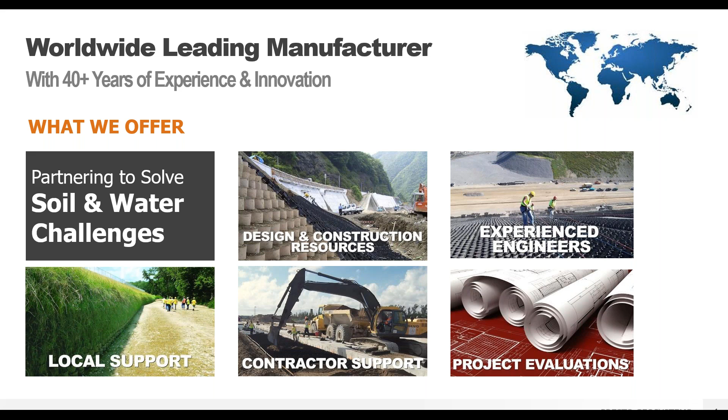We operate in 4 product areas using our GEOWEB geocells, which can be used for load support, slope and channel protection, and constructing green retaining walls. We have porous pavements, both vegetated and aggregate solutions, and lightweight reusable construction mats. Like I said, today is going to focus on the load support application, hopefully with a little discussion on the concrete channels.

So let's begin with discussing how GEOWEB 3D confinement can provide benefits for unpaved and paved surfaces. The GEOWEB system consists of 2 main attributes. The first is the cell size. The cells come in 3 diameters: 8.5, 10.5, and 18 inches. The cell wall heights include 3, 4, 6, 8, and 12 inches. The actual cell size and height depend on site-specific project details and site conditions.

We will provide a free evaluation, typically including a written summary, cross-sections, calculations, and specifications, for free. No matter what size of project, we provide the same amount of service.

The ultrasonically welded seam, where all the connecting points are located, is very important to the function of a geocell. The stronger the seam, the better performance of a geocell, period. A strong seam allows for better lifetime performance. GEOWEB is produced using high quality, 100% virgin, high density polyethylene for consistent and strong welds at the seam.

GEOWEB geocells do not use fillers or exotic polymer alloy blends, which can ultimately reduce weld strength and are offered in some competing products in the name of increasing cell stiffness and reducing cost. To avoid weld failures and the damaging effects of differential settlement, uniformity and performance across all elements of the geocell is much more important than stiffness alone.

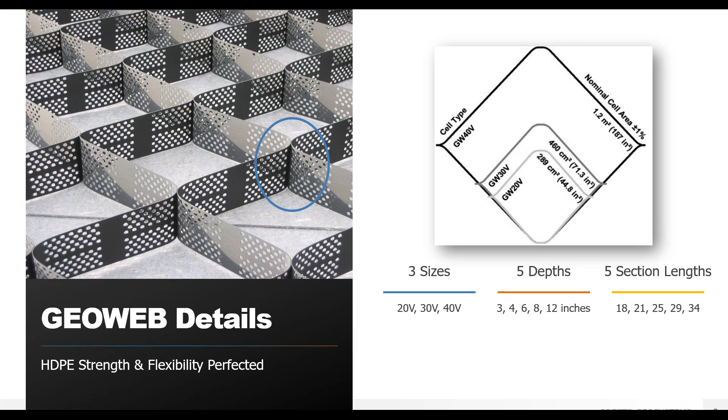Here you can see a typical GEOWEB panel. It comes tri-folded on a pallet. Each section has a nominal width of 8.5 feet, with lengths up to 34 feet, depending on which size you go with. The panels are very flexible.

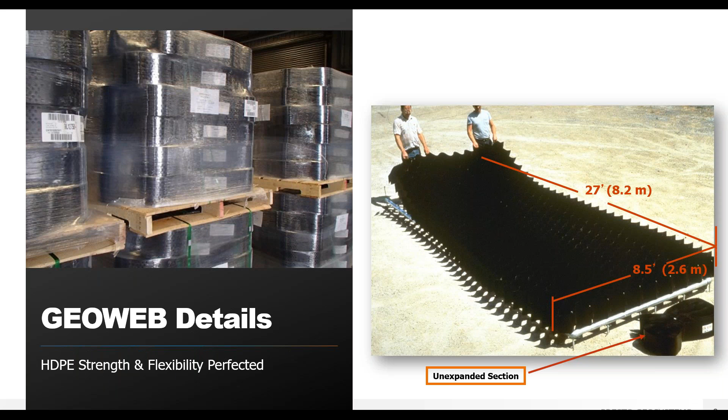They open like an accordion, so they're very flexible and can accommodate a site that is not completely level. For a geocell system to perform, it's critical that both the factory welded junctions and the field junctions that connect individual panels perform at a level commensurate with the cell walls. Therefore, incremental improvement in one characteristic is only valuable if improvement has also been made in the other components of the system.

As I said, GEOWEB is made from 100% virgin HDPE. It's a proprietary formula that has stood the test of time for more than 40 years, containing no filler or exotic polymer alloys. For most typical sites, GEOWEB retains its durability for greater than 50 years based on lab testing, indicating no degradation even at full 100% UV exposure from the sun.

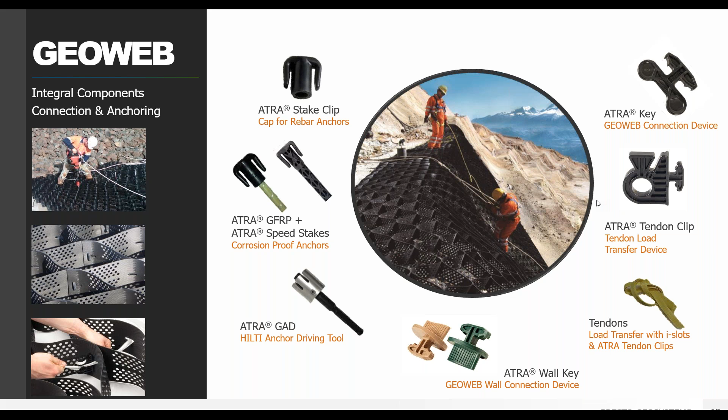You can see a picture here of a very steep slope. We're using polyester tendons, almost like a set of drapes, hanging off the slope. We use ATRA tendon clips, which tie around the tendons and bring the load up to the top of the crest. We have all kinds of different accessories, no matter if you're doing a load support application, a slope, channel, or a wall.

For load support applications, the ATRA key is a major component for a completely integrated system. ATRA keys connect GeoWeb panels into a single system. The keys' speed installation are made out of plastic and will last the lifetime of the project. ATRA keys ensure that the panels will not separate and that the GeoWeb system will not fail under anticipated cyclical loads. The specific engineering values of the ATRA key will ensure the system holds up to loading over time without the corrosion seen in staples or the failure of underperforming zip ties.

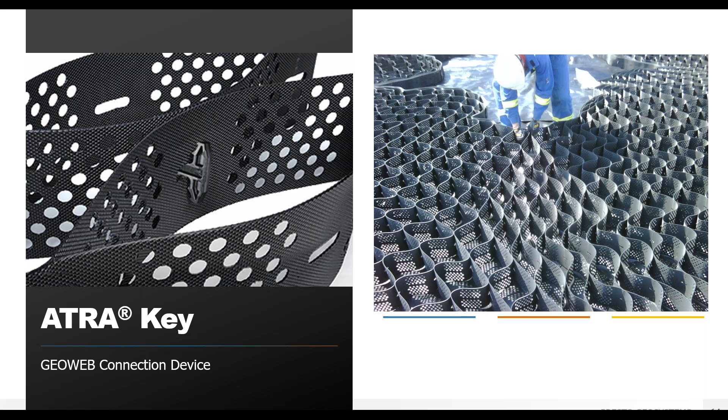The purpose of the cellular confinement is pretty simple. It's basically just to stabilize the movement of unstable soils, whether that's horizontally or vertically. It is an engineered system integrating multiple geosynthetics with the best method of confinement and subgrade stress reduction.

Here's a typical cross section for a load support application. We start with a subgrade, a bearing strength, typically expressed as a CBR, California bearing ratio, or an LBR.

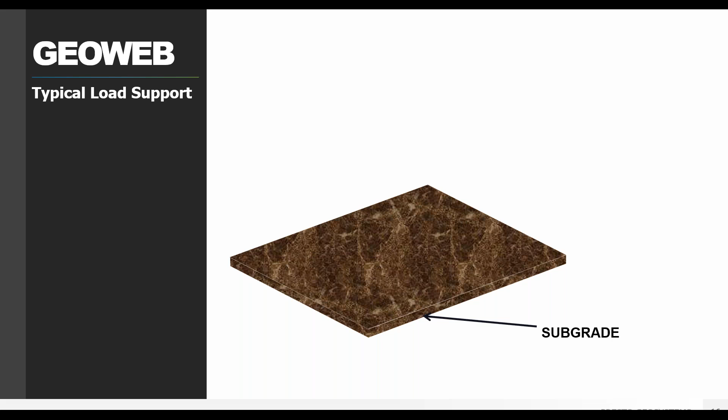Then we decide if we need a non-woven or a woven geotextile based on the system application and subgrade type. 95% of the time we are going to have some type of geotextile underneath it, unless the subgrade is the same material which goes into the geo.

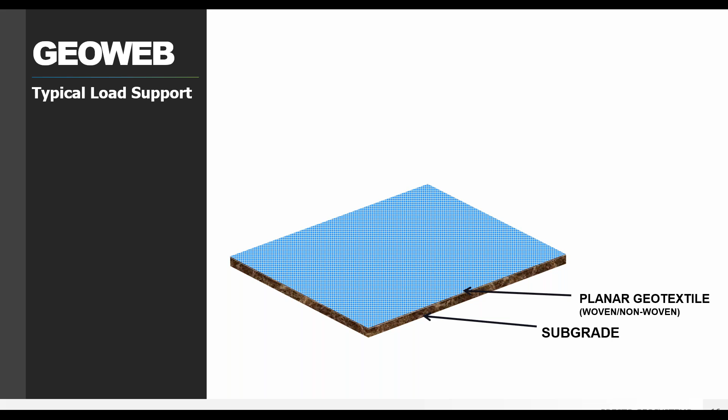When we are talking about woven geotextiles, I'm referring to enhanced woven geotextiles, not slit tape wovens, which have very limited flow capabilities. They're almost like a pool liner, so you get water pore pressure buildup underneath that geotextile. If you have a slit tape, it doesn't allow water flow, and it can actually build up pore pressure and lead to global failure. So we never recommend using slit tapes under geo for any type of application.

A subbase may be required, and we'll determine that during our evaluation. We do our calculations, then the geo is put down. Like I said, we can fill it with sand, recycled materials, on-site materials with less than about 10% fines, or crushed aggregate.

Going to have a surface course. If it's an unpaved road, we like to see a minimum 2 inches over the top, whatever the material is, supporting the given load.

Geoweb 3D confinement works this way: when a vertical load is applied, the active earth pressure in the loaded cell pushes back against the passive earth pressure in the adjacent cell to form a stable system. So each cell helps support the ones around it. The Geoweb cell walls transfer hoop stress, which is important to keeping the system intact. It creates what is known as the mattress effect.

So the strength of the seams around each cell, the material stiffness of individual strips, and the connection method between panels are all important factors in determining how the geosystem can improve site conditions. Strong seams, semi-ductile resin properties, and integrated connections are critical to uniform performance.

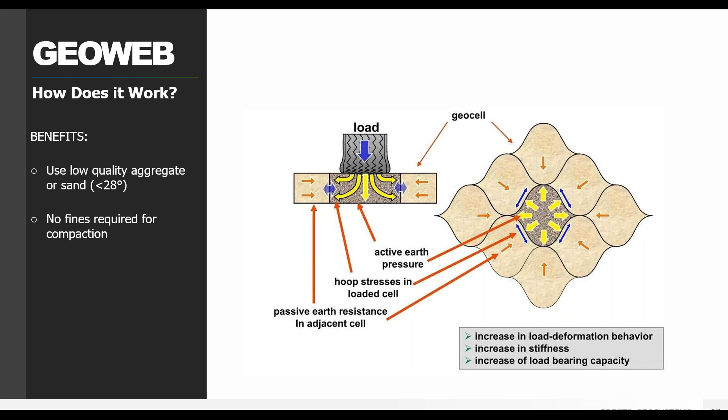Here you can see the stresses on a typical subgrade: unsupported on the left and geo reinforcement on the right. You can notice how there's a complete elimination of high stresses at the surface with geo. Stresses are reduced and distributed over a wider area. Once again, we call that the mattress effect. It reduces the stress reaching the subgrade and leads to a significant decrease in deflection and rutting.

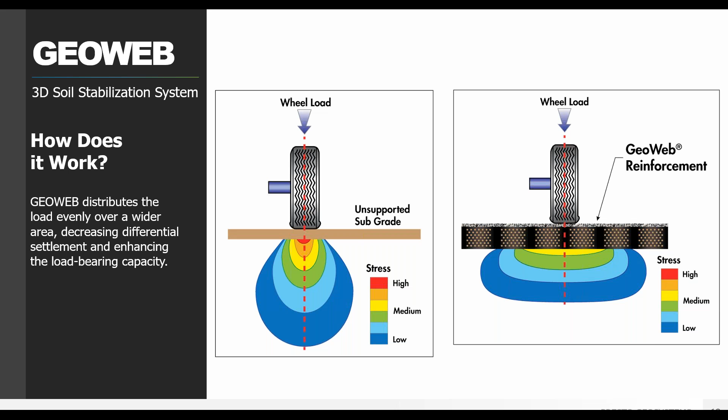The second main attribute of the geo system is the infill. One of the important benefits is we can actually use, as mentioned, low quality aggregate, recycled materials such as recycled or crushed concrete, and even coarse sand. When we invented the geo back in the late 70s with the Army Corps of Engineers, the main use was for sand roads and beaches, getting heavy vehicles around beach sand. It was actually called sand grid back when we first invented it with the Army Corps of Engineers.

We can also eliminate fines when desired, since the cells provide confinement, aiding compaction and cohesion of the soils. Without the fines, you can significantly improve drainage and let the water flow freely through the system, preventing pore pressure buildup and global failure. Also, you can use that open area, that void space, about 35% for 3/4 inch crushed aggregate.

You can imagine the amount of storage that you can store inside the geocell.

The ability to use sands and low quality aggregates really sets us apart from other geosynthetics. Those products require high quality crushed aggregates, high friction angles to achieve optimal performance. With our system, low friction angle materials in the 20s are just fine. The geo panels achieve their full potential even with these poor materials, which can be a significant cost savings if you can use on-site or recycled materials.

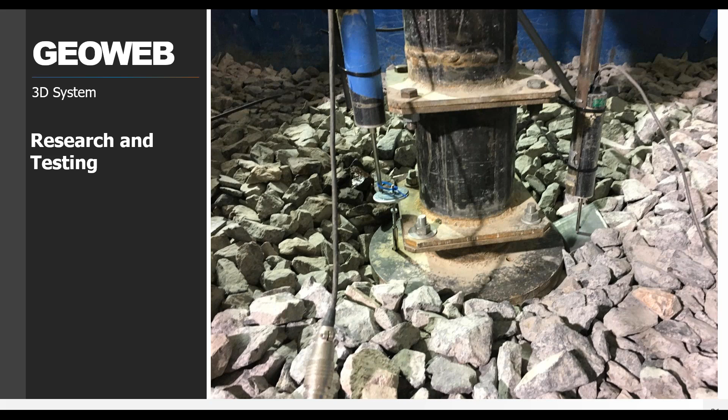I'd like to speak a little bit about some recent research we've done on cyclical loadings. The research was conducted at University of Kansas under the direction of Professor Han, who has been conducting research on geocells for almost 20 years. Ben Leshchinsky, professor at Oregon State, did his PhD thesis on geocells and conducted the finite element analysis. And Hai Huang from Penn State provided smart rock technology.

We wanted to use the recent technology to confirm the stabilization benefits of the geocells. That program was conducted over weak subgrades at University of Kansas. We put it under a 37.5 kip wheel, and varied the subgrade CBRs from 0.5 to 5%. We did a bunch of different control sections and geocell supported sections.

Smart rock included a motion vibration sensor that could record rotation, translation, and orientation. The earth pressure cells were used to measure the vertical stresses and displacements at the interface between the surface and the subgrade.

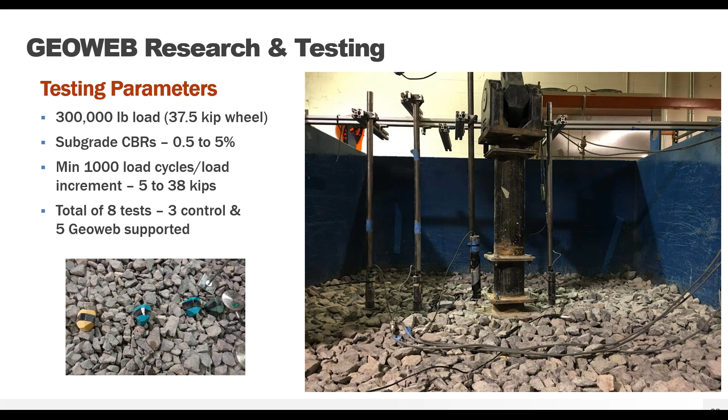The cross section consisted of an enhanced woven geotextile, a 6-inch geocell filled with crushed aggregate, and an 8-inch surface layer. To evaluate movement under cyclical loads, we put smart rocks inside the geocell panels, and also located one 4 inches above, in the middle of that 8-inch cross section, with earth pressure cells another 4 inches above that.

So the goal is to confirm the stabilization controls movement not only in the cells, but also above the panels.

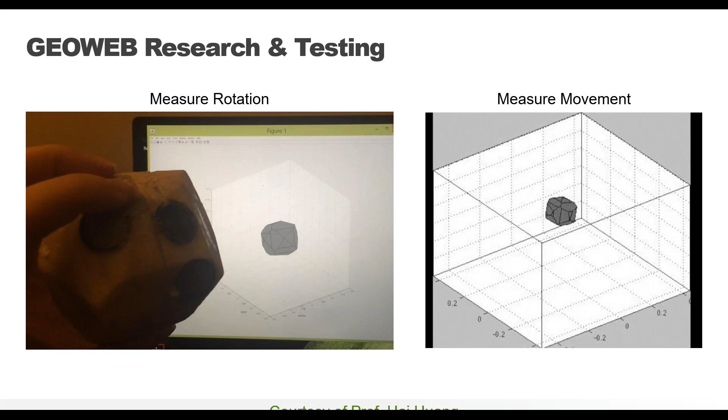Here you can see the smart rocks, how they actually measure rotation. Under a cyclical load, when you're getting rotation, you're breaking down that material, which leads to loss of aggregate over time for an unpaved road, basically attrition. You get a lot more rutting and material breaks into smaller particles.

We also looked at movement, basically side to side, and how that cyclical loading would move that material not only in the geocell but also above it.

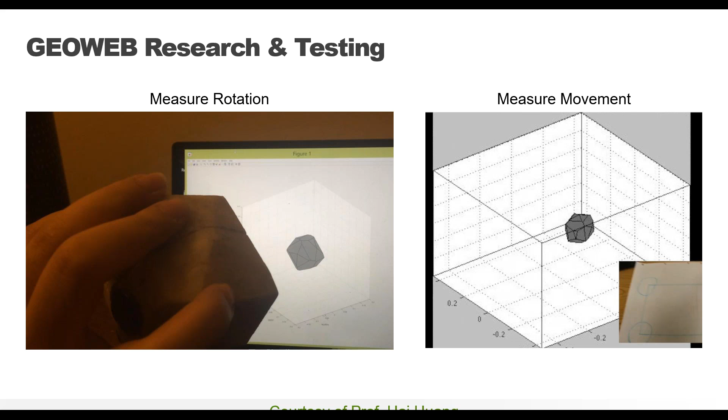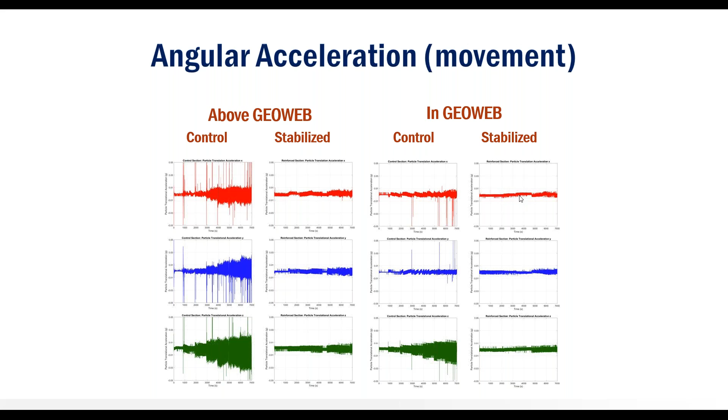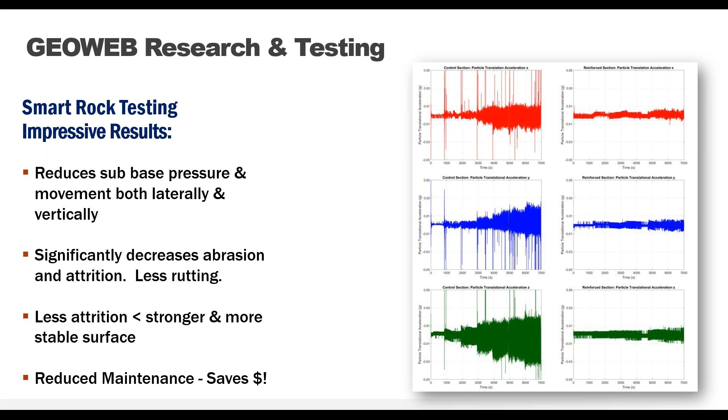The results clearly show that Geoweb stabilization significantly reduces particle acceleration and velocity, not only in the cells, but below the surface and between the top of the geo panels. This will effectively minimize movement of your infill by providing lateral confinement, so breakage, vertical compression, attrition, and spreading are minimized, and performance can be significantly improved. By controlling particle movement and rotation, this leads to decreased maintenance and rutting for unpaved surfaces and a more stable base for paved surfaces, directly leading to cost savings.

Here you can see the finite element analysis, which is what Dr. Leshchinsky did. The confinement was effective in redistributing vertical stresses on the subgrade, resulting in large areas of subgrade mobilization, shear strength, and reduction of plastic deformations.

Geoweb reinforcement decreased the pressure at the subgrade interface by over 50% for weak subgrades. It also increases the load-bearing areas of subgrade and results in decreased interface pressures, which leads to lower subgrade settlements and rutting.

I want to go through some typical projects we've done for unpaved and paved surfaces. Here's a typical problem—one of the first ones we did way back in the day. I'd like to show this one because it's a significant amount of rutting. This project was a real rush, an intermodal facility by our office in Wisconsin.

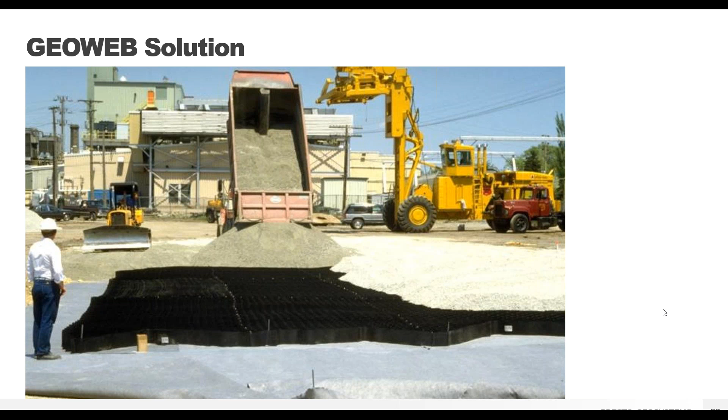After a couple passes of the reach stacker, you'd get significant ruts on the surface. We worked with the rail company and came up with a solution. This was before we put perforations and texture into our geo panels. You just dump crushed aggregate on it, spread it out, and there's no rutting. This was a heavyweight non-woven geotextile, 8-inch geo, and a 3-inch wear surface. So we went from rutting to a stable surface.

This is an intermodal project we did for CSX down in South Carolina. As you can see in the picture, the 60-ton reach stackers were severely rutting on the existing aggregate yard. The rutting led to slowing down not only the unloading but the loading of the containers, along with routine maintenance to keep the yard in operation.

The subgrade here wasn't too bad, like 1.5 to 2%, but there were a lot of fines, which led to rutting. They had graders on this site almost continuously, because after a couple passes of the reach stacker, you can see ruts almost halfway up the tire.

We worked closely with CSX's engineering to come up with the Geoweb system to support the load and eliminate the rutting. Based on the available geotechnical data and working with the geotech for the project, it was determined that the existing infill material on the site could be reused to fill the geo panels.

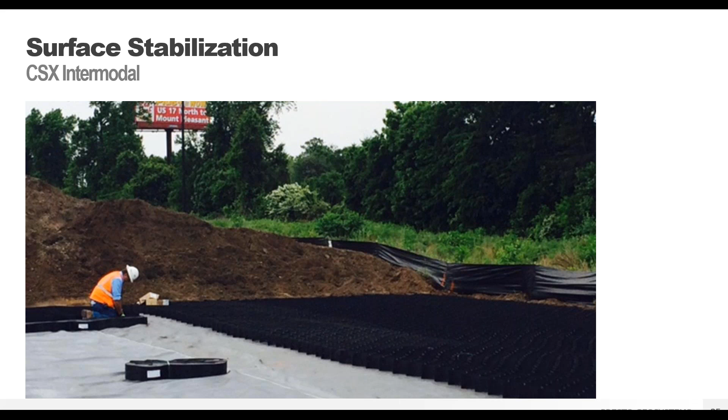This led to a significant reduction in cost by avoiding the need to import outside aggregate fill for the geo. The solution consisted of an enhanced woven geotextile, 6-inch geo, and a 4-inch wear surface. You can see the enhanced woven geotextile and the geo going down, and the geo panels being filled with on-site soils. The contractor stripped off the existing surface material down to the desired elevation and stockpiled it to use for filling the geo panels, eliminating the need to import costly fill.

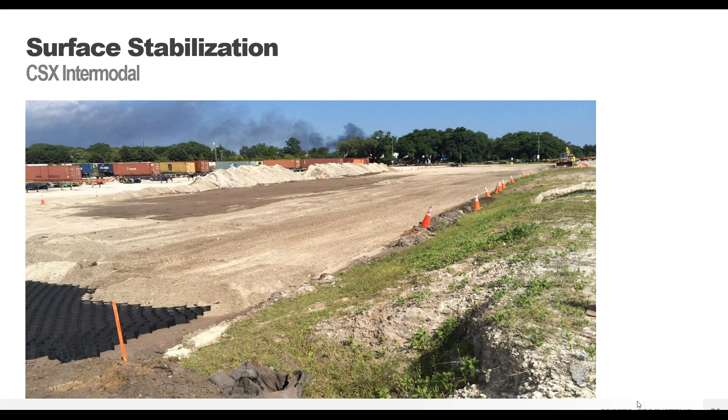The big thing with this application is they completely eliminated the daily maintenance. They got the yard back into service a lot quicker because they didn't have to import all that fill. You can see the final solution: the Geoweb system supporting the load. The Geoweb confines that fill, even on-site fill with high fines, essentially eliminating the potential for rutting.

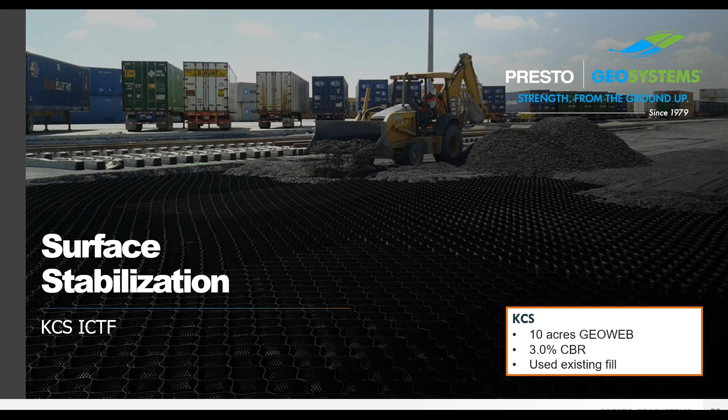Here's a project we did down in Mexico for Kansas City Southern Railroad. The original design called for reinforced concrete, but the bids came in well over budget. The subgrade wasn't that bad, but the railroad came to us for a value engineering solution. We worked closely with the engineer, who came up with the solution to support 80-ton reach stackers.

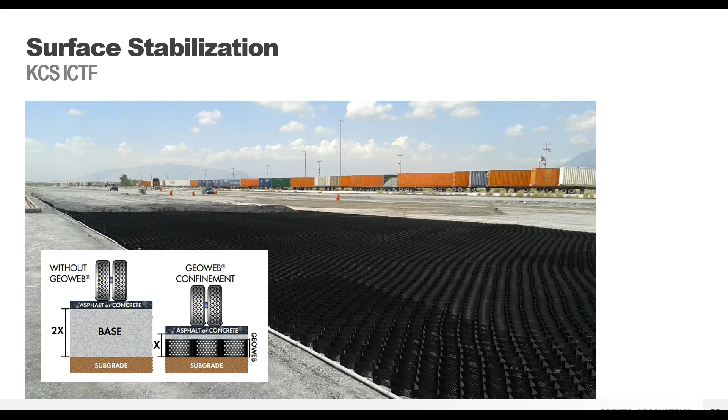The design here is the same as the last one: an enhanced woven geotextile, 6 inches of Geoweb filled with low quality fill, and a 4-inch wear surface. You see it being infilled with low quality crushed aggregate. Here we limited the fines to about 15% to allow for some storage of stormwater infiltration into the site. In this photo, the truck dumps the aggregate into large piles onto the panels, either with a front-end loader or a bulldozer.

The aggregate can just be pushed into the empty cells. It's a pretty fast and efficient process. It doesn't take any additional training or expertise on behalf of the contractors.

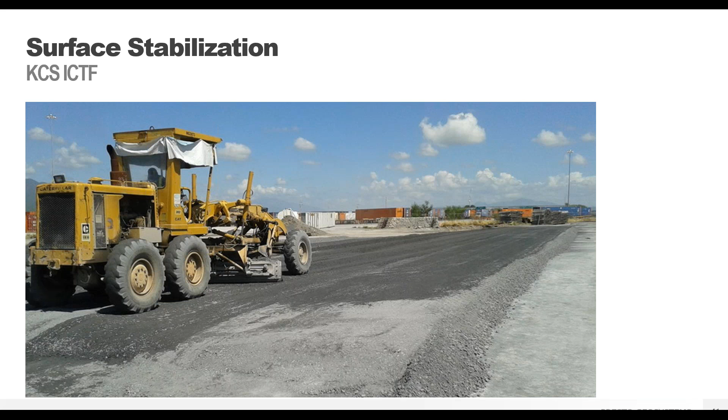Now here you can see the final wear surface. After placement, they wanted to keep the dust down a little bit, so they provided an asphalt tack coat, sort of as a surface stabilizer to control the dust.

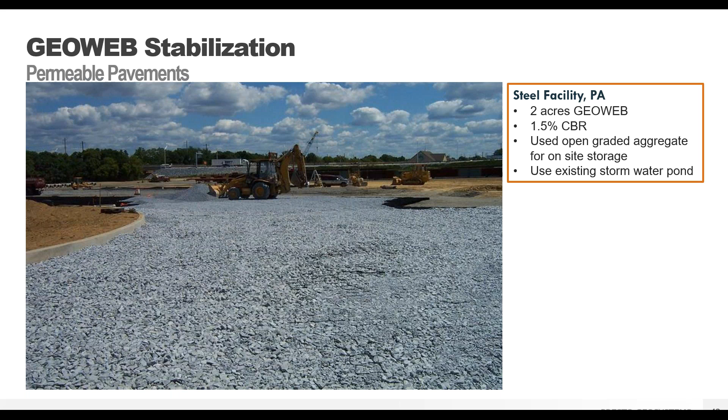This was an interesting project we did. We solved two issues. This was a 2-acre site in Pennsylvania where the owner wanted to increase the size of his manufacturing facility. The first issue was to provide a durable surface, something that these big gantry cranes can operate over.

The existing subgrade is about 1.5% CBR. So through the design process, we came up with, once again, a heavyweight non-woven geotextile, 6 inches of GEOWEB, and a 3-inch wear surface.

The second issue was to provide on-site water storage to allow the facility to reduce the volume. They wanted to go asphalt at first, but they didn't have the ability to expand the site because they needed to expand stormwater ponds. That's the main reason they came to us.

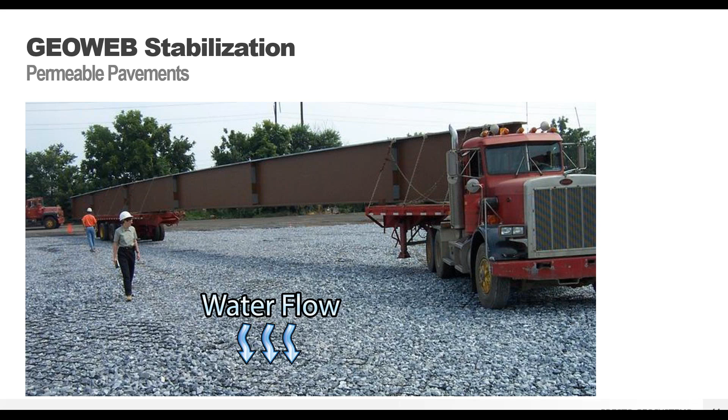We designed a system with that open graded aggregate. As a rule of thumb, a 3/4 inch crushed aggregate has a void space of approximately 30%, so you can imagine how much water we could store inside of that. They were allowed to use the water storing inside the GEOWEB as a credit, so they didn't have to expand their stormwater ponds. Just an up-close picture of that open grade aggregate.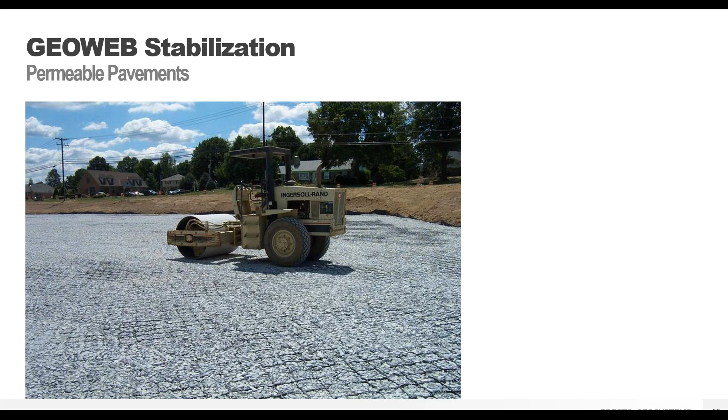On geo compaction, when you're compacting, whether it's sand, high quality aggregate, recycled material, or open graded, there's no reason to really high-strength vibrate this material. Usually just rolling over the top provides adequate compaction. So make sure the construction supervisor, engineer, or contractor on site knows they don't have to hammer it with vibration. Just keep a light vibration if needed, not a very high vibration.

We do port intermodal work all over the world. This is a surface stabilization at the Port of Invergordon in the UK. The site was 6 acres, consisting of two areas. One was 3.5 acres and used 4-inch deep geo panels, and the second area was 2.5 acres and used 6-inch geo panels.

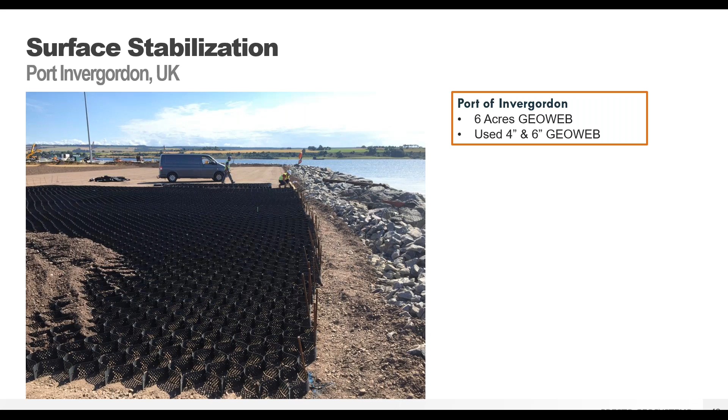The two areas were subjected to different loading conditions, so during the design phase we worked with a consultant to determine the most appropriate panel depth to meet site conditions and provide a cost-effective solution. The 4-inch area was used mainly for vehicle parking, and the 6-inch geo was used in reach stacker and container storage areas. The area was constructed as an unbound pavement with a crushed gravel surface.

The geo presented the perfect solution to minimize the cross-section depth. Differential settlement on this site was a significant concern because there was a variable subgrade that ranged from almost less than 1 up to about 5%. So we worked with the engineer to develop a cross-section that would bridge those low subgrade areas, and by utilizing enhanced geotextile and geo, we could span those areas and prevent differential settlement.

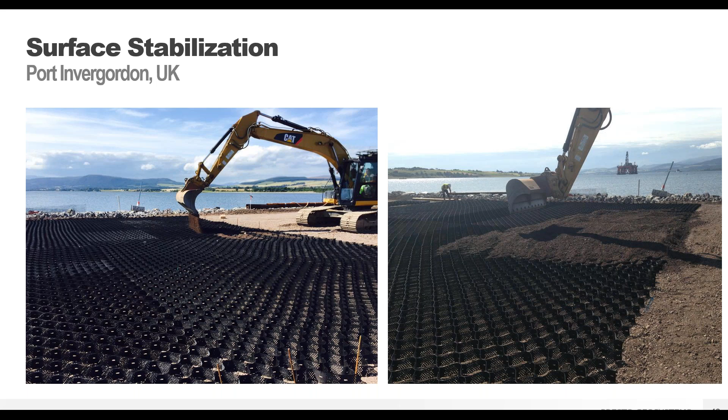You can see up close the infill area. There was a pretty low quality mixture of sand and aggregate. The biggest thing was it was locally available, so they didn't have to bring in high quality crushed aggregate that wasn't available locally. The original design evaluated geogrids, but the required high quality infill material was too expensive, so that's why they went with the geo.

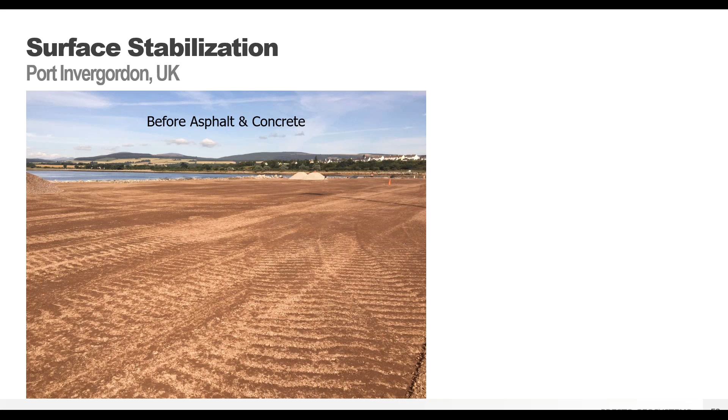Once again, compaction: just roll it or lightly vibrate it. You can see the final surface after compaction, totaling 6 acres. And that was the final surface.

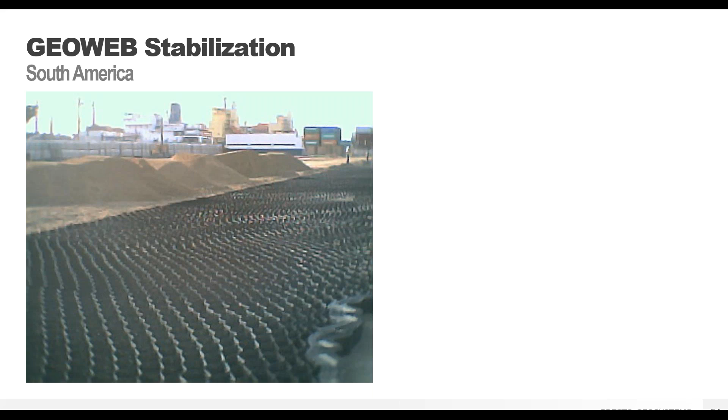Here's a project we did in South America, about 15 acres, using a 6-inch geo. The main reason the owner selected geo was the ability to use the local sand fill. There wasn't any high quality aggregate, or even really low quality for that matter, available at this port. So they used a locally available sand infill.

There are many different installation tricks when installing geo panels. This contractor wanted to make sure the first set of panels were installed very square, so we built some spreader frames, added some fill, and just removed the spreader frames after the infill. I always say, when I'm on site, it's like hanging drywall: you want to make sure the first 4 or 5 panels are installed nice and square. Once they're infilled, you can pretty much use the weight of that system to allow for installation.

Doesn't matter how small the project is, the size. We always provide the same amount of technical support in our evaluations.

We do a lot of work with the Class 1 railroads, not only in port but also rail. The Class 1 that operates this facility told the owners to give us a call, since it was taking so long to unload their trains.

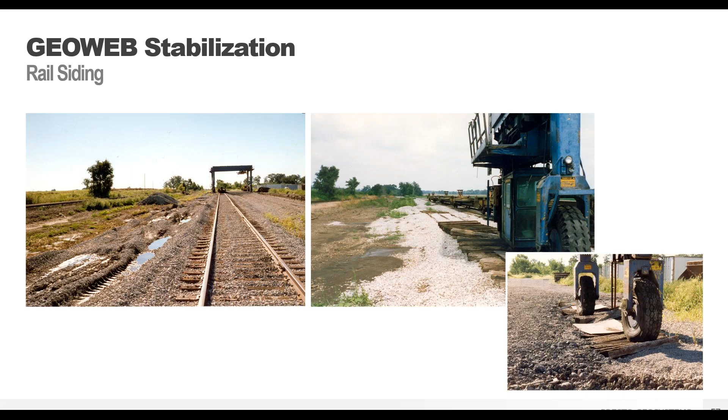Like I mentioned, this project only used about 16 panels of GeoWeb on each side of the track. We provided the full evaluation, consisting of a heavyweight non-woven geotextile and 8-inch GeoWeb along with a 4-inch wear surface, which completely eliminated the rutting.

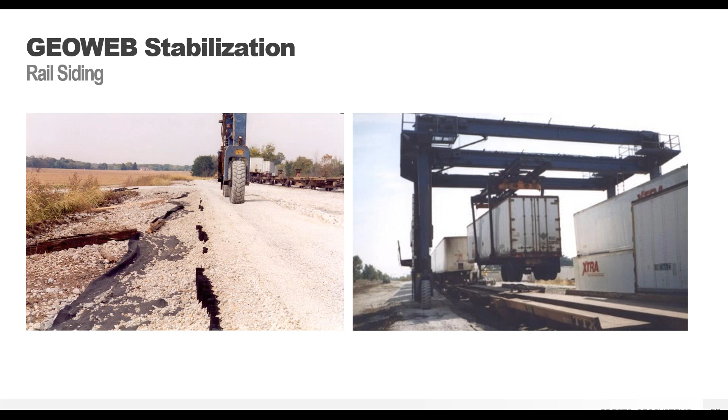This has been in operation for about 10 years.

As I mentioned many times, we provide the free evaluations for all our projects, no matter the size. We'll include a written summary, cross sections, calculations, and specifications. Typical turnaround time is 1 to 2 days.

We will totally explain how our calculations work, so you have a total understanding of how it works, of the calculation methods.

Now we'll discuss under pavements. There's asphalt, reinforced concrete, and roller compacted concrete, especially in areas with soft subgrades and drainage issues. We created this slide to recognize the problem of an unstable base under hard pavements, which leads to rutting, settlement, potholes, pavement degradation, and even total failure.

The common contributing factors include differential settlement, localized settlement of the soft subgrade, as well as poor drainage that can lead to pore pressure buildup beneath the pavement and ultimately failure. So reducing the damaging effects of that differential settlement and protecting against the buildup of pore pressure are key factors in extending pavement life and reducing long-term maintenance costs.

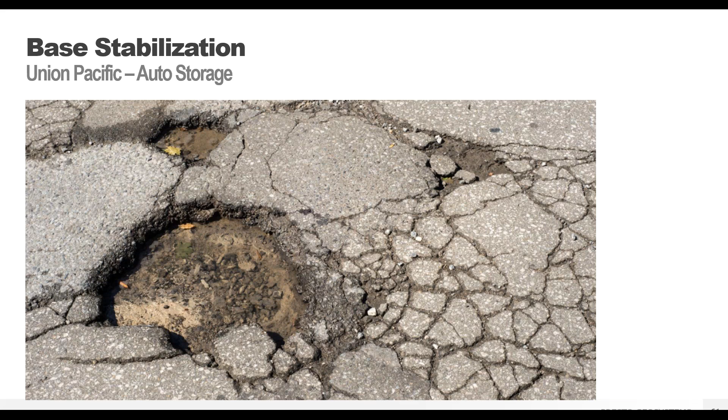The project was for Union Pacific Railroad in San Francisco. It is an auto storage area. The original design included geogrids with a high quality A grade aggregate.

When construction started, the subgrade was so wet, it was soft. The geogrids just weren't a cost-effective solution, and bringing in too much of the high quality A grade aggregate, the engineer contacted us.

We provided a value engineering solution using GeoWeb. This one had soil strengths of around 1%. So we worked closely with the engineer and the railroad to provide a good solution.

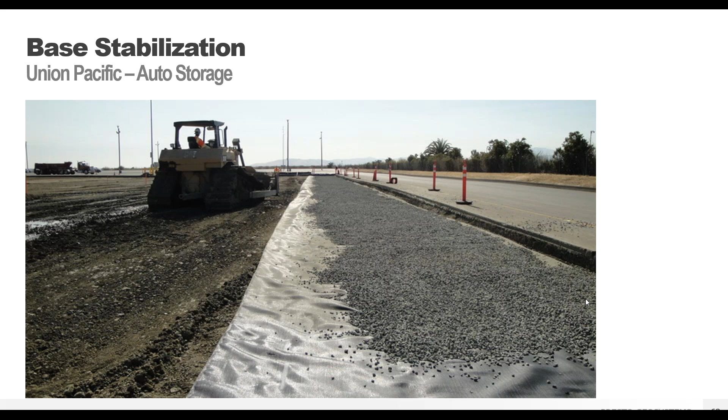It consisted of, once again, the high strength woven geotextile, a 6-inch compacted base to really get that geotextile into tension, and then we put down a 6-inch GeoWeb layer with a 2-inch wear surface, and then they provided asphalt over the top. Here you can see the expanded panels, open graded.

They wanted to use an open graded infill, so we limited the fines to about 10%. This facility is right next to the bay in San Francisco, so the high tides can really get up into that base layer. We wanted to have some ability for the water to flow through the GeoWeb panels.

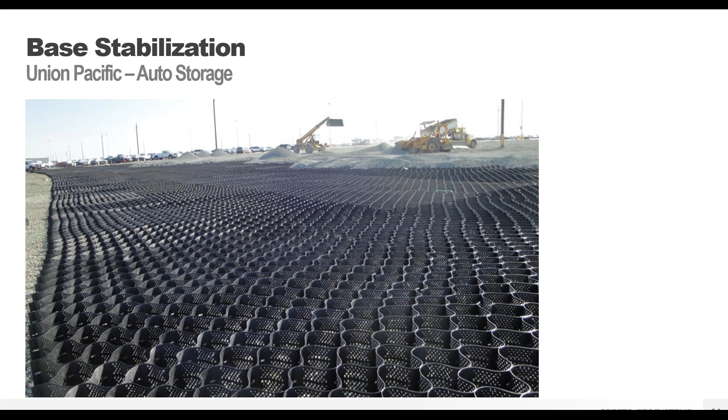Just a closer view of the infill. Once again, aggregates just dumped from the dump truck and pushed into the cells with a bulldozer or front end loader. Most of the time I see they have GPS on them, so the GeoWeb panels install quickly.

The installation of the panels is usually well ahead of the infill placement. And here's the placement - they put 4 inches of asphalt over the top of the GeoWeb panels, using a regular asphalt paver. It was compacted with a smooth barrel roller - no special equipment or procedures are required when paving over the GeoWeb panels, so paving crews can install at the regular speed without needing extra training or additional requirements of any kind.

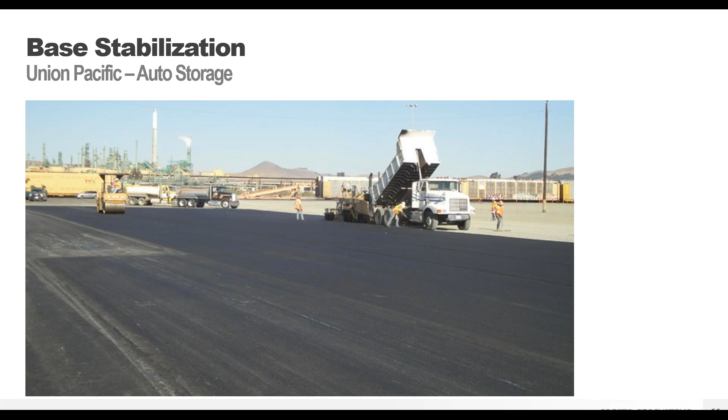This is another auto storage yard, for BNSF. This is a 25-acre site right by the airport in Seattle. Once again, a variable CBR, about 1 to 3%, averaging about 1.5 CBR.

This one was interesting because once again, it was originally going to be a geogrid solution, but the city would not allow them to bring in as much aggregate because it came right into downtown Seattle. So the contractor approached us for a value engineering solution, and we were able to use the on-site material mixed with imported material, which significantly decreased the amount of aggregate that had to be brought to the site.

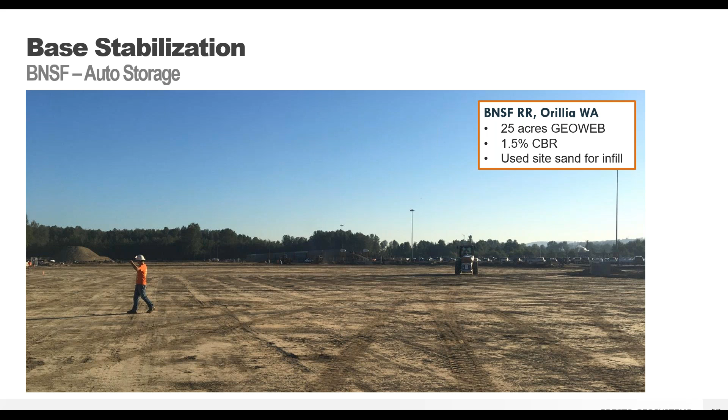Staging is very important for any large project. We have a significant amount of installation experience. We will be on site with the contractor for tips for quick and efficient installation methods. That'll be us or one of our reps all around the world.

Here you can see one of the tricks we use is staging tables where adjacent panels are connected together prior to expanding into place and placed across the prepared subgrade. Each panel here has an area of 230 square feet, and this contractor used a staging table to connect 3 panels, so basically a total area of almost 700 square feet. Using the staging table allows workers to stand up while connecting the panels with the ATRA keys.

The panels are then transferred for installation. Typical installation rates are about 3,000 square feet per hour with a crew of 3. We'll also provide pre-construction installation training to the contractor, so we make sure he has everything on site when we go to do the installation.

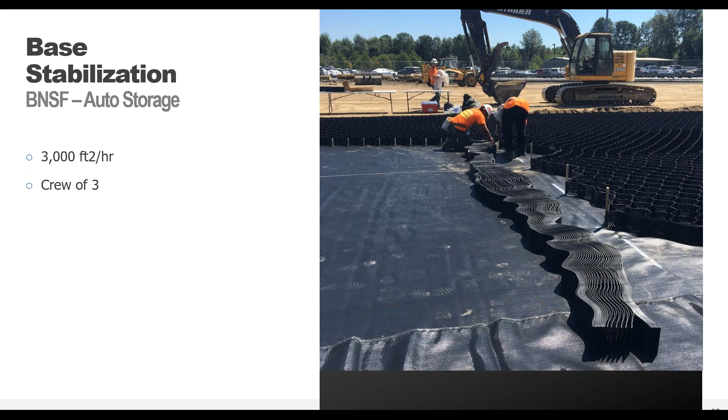This contractor, once again, wanted to have a pretty square panel, so we actually surveyed the entire site, and each one of these stakes is a corner of a geo panel.

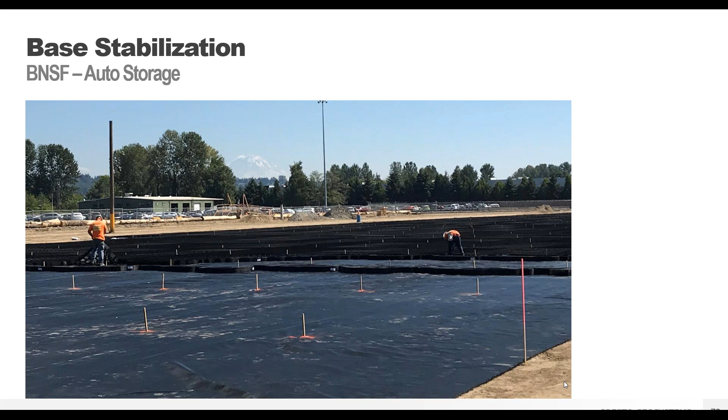You can see a picture of the site with the installation, a 4-inch wear surface, using it as access. Once again, just dump it. Here they're using a bulldozer with a GPS system to install it, and here's the salvage stockpile material that they're going to use to mix and make the infill for the geo. Once again, just dump up to it and spread it out with that bulldozer, shown with the GPS on it, and finish surface.

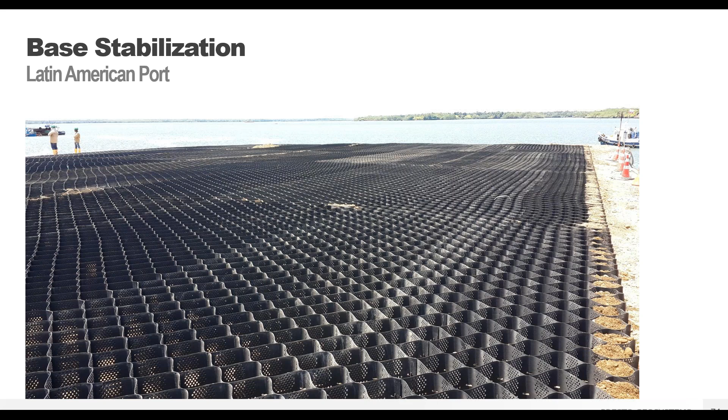This is a project for a port in Latin America. It serves a coal and a container storage area. This is an access road and a big storage area. Subgrade had a very low CBR, and the owner contacted us for a base stabilization system for supporting the asphalt and bridging those poor soil areas. So we were closely involved as engineer.

This one used 6-inch geo, once again with a heavyweight geotextile. We were also able to reduce the original pavement depth from 8 inches of asphalt down to 6 inches due to the reduction in the stress reaching the subgrade. That led to a pretty big savings for the owner.

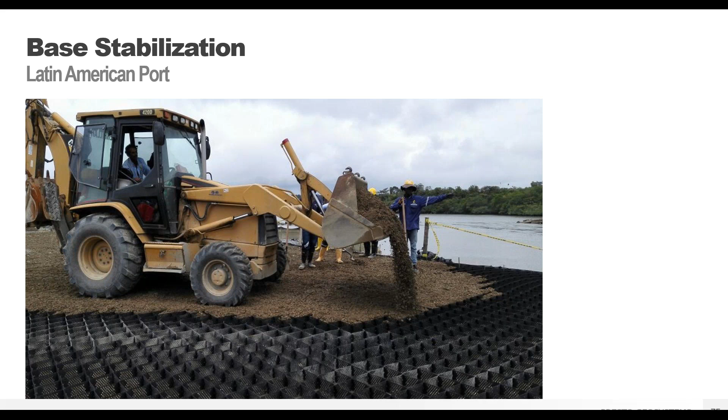And the key, once again, to this project was providing a stable base and the ability to reduce the asphalt layer by 2 inches.

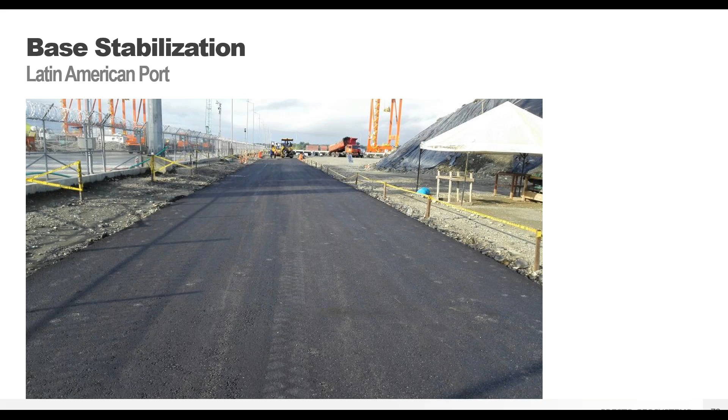Here's a really interesting project that I was on 3 years ago. It's for a Port of Panama. We were doing a storage area for unloading of the railroad cars. And during excavation, we were down there, they came into a site with petroleum contaminated soils.

Actually, the Air Force gave this site to the port for free. And as we started doing the excavation, we ran into this material. The options were pretty limited. We could remove it for off-site treatment, or do an on-site treatment. Either of those methods were extremely expensive.

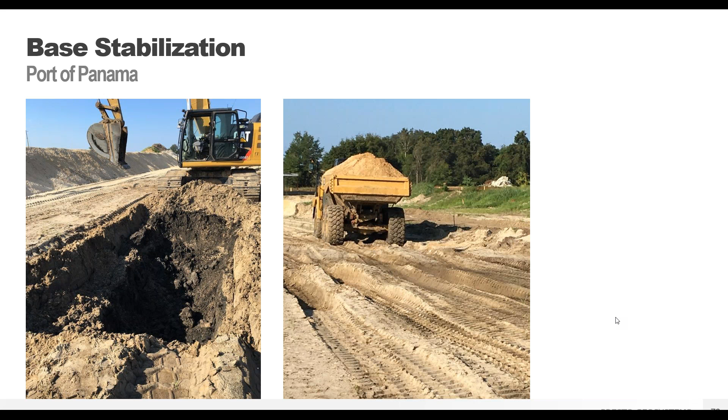Since we can use sand for infill materials, what we did is we just stockpiled the material. You can see over here, and every twice a day, the contractor would just go in there and excavate, trying to volatilize some of those petroleum contaminated soils out, and we actually used that material for geo infill. So we didn't have to take any of those contaminated soils off site. We left them on site and used it for geo infill. And you can just see the geo panels going in after an installation.

So for asphalt pavement service, once again, we provide the full design service. We use load equivalent factors. We use the AASHTO method for some calculations. We also use a structural design of heavy duty pavements for port and other industries. We have multiple designs we can use depending on how heavy and how many passes you have at your facility.

This was a design build, Florida East Coast Railroad, right adjacent to the airport in Fort Lauderdale. In the overhead photo, you can see geo panels. They had a big gantry crane here, so they're installing geo to support the gantry cranes and areas around it.

This was actually design build, so the original project was going to be based on geogrids and aggregate. So we went out with that for design build. It also included 8 months of surcharge over at the site to accelerate primary consolidation and protect against excessive, differential settlement in the future.

One of the design build contractors came to us, and we were asked to be part of the team to come up with cost savings to this system and prevent that long-term settlement, to ease the concern.

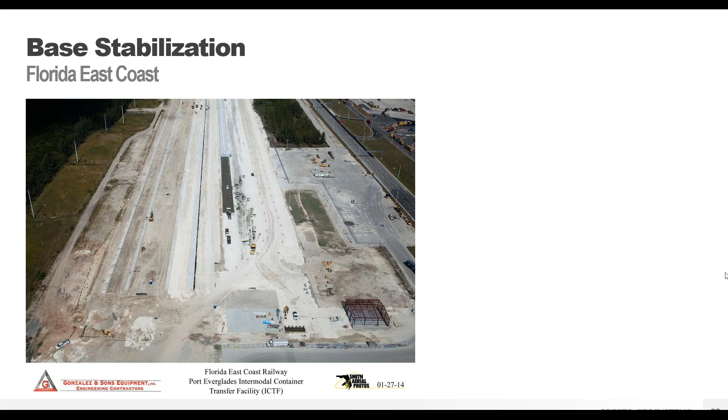So we worked with the contractor and the engineer to come up with a geo cross section that served two functions. The first was the ability to use on-site sand to replace the costly 3/4 inch crushed limestone that would need to be imported to the site by barge. The specified geo was too expensive, so the ability to use the sand infill saved us a significant amount of money and construction time.

The second function was the ability of the geo system to control short and long-term differential settlement to extend pavement life. Since geo significantly reduces vertical stress reaching the subgrade, it results in a more durable system with increased pavement life through controlling the settlement.

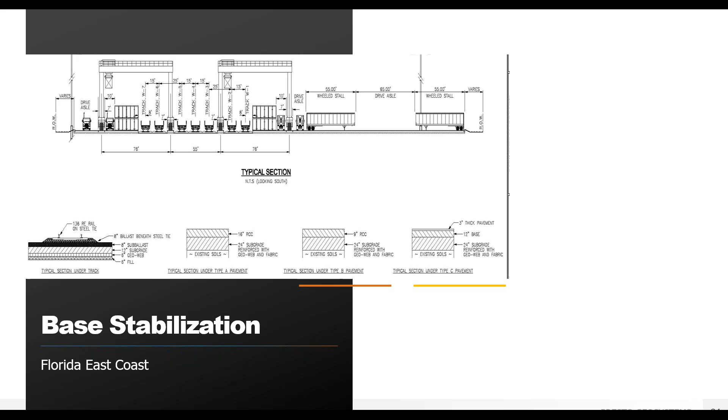So the design consisted of a high strength, enhanced woven geotextile, 6-inch deep geo panels, and an 8-inch sand cover. Here you can see the geo panels being installed on top of the enhanced woven geotextile.

So that combination of the geotextile and geo really will control the settlement, bridge areas of soft soils, and reduce the stress in the subgrade.

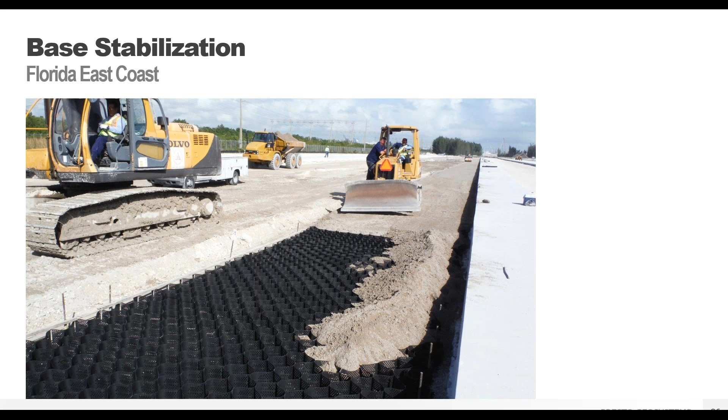You can see the sand infill being placed in the cells, and this is just being compacted with the roller compactor, with GPS. Here they had installation of roller compacted concrete pavement.

The RCC pavement is an interesting wear surface. It's basically a low slump, high PSI concrete with no reinforcement. Goes down in lifts up to 12 inches in depth. It is becoming more popular.

We're seeing it in intermodal and port projects. Another advantage on this system, through the use of geo, we showed through our calculations and working with the engineer...

We reduced the original design of 24 inches down to 18 inches. So instead of 2 lifts of 12 inches, we had 2 lifts of 9 inches. So we saved 6 inches of RCC pavement, saving them significant money, not only in cost, but also in construction time.

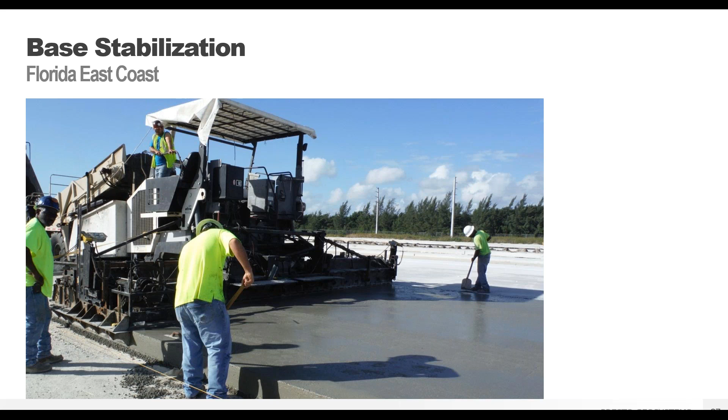And you can see right after placement, the rollers are on it. Very durable surface. I was there before COVID. The site has settled a little bit, but it's settled uniformly, and no maintenance has been required. It's definitely within the limits they had set in the design.

This is Port of Oakland. This is a project from the early 2000s, one of our earlier port projects.

They wanted to use lime stabilization to stabilize the bay mud, but they were not allowed to use the lime stabilization due to environmental concerns and the associated project delays.

The contractor, the project manager, was actually in Desert Storm. We installed millions and millions of square feet of Geoweb for military access roads. He was very familiar with Geoweb.

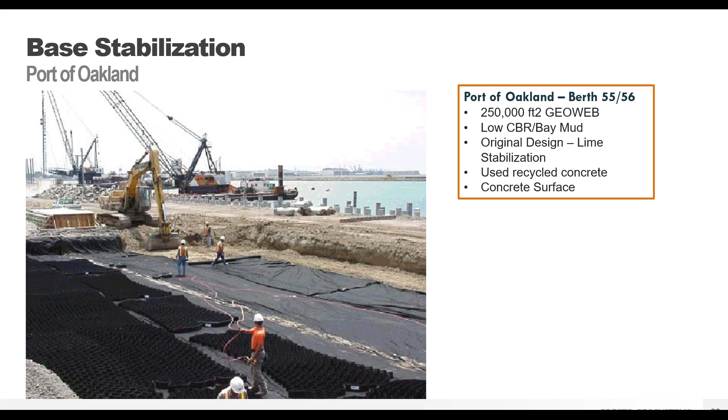He contacted us, and we did a VE solution to eliminate the lime stabilization, but also to significantly cut the cross section down. So about 250,000 square feet, that bay mud, just like in San Francisco, high tides, a lot of water, a lot of poor soils.

So the cross section here consists of a heavyweight, non-woven geotextile, 8-inch Geoweb panels, and an 8-inch base. You can see the Geoweb panels being infilled.

Another cost savings for this project: the international airport in Oakland was going under some pretty big upgrades at the time, so there was a ton of basically waste material, waste concrete from the installation of the new runways at the airport.

So the contractor was able to use this material and crush it. We used recycled concrete for this project. So you can imagine how much time it saves, not only in the cost of materials, but also in the trucking, since it's right next to the port.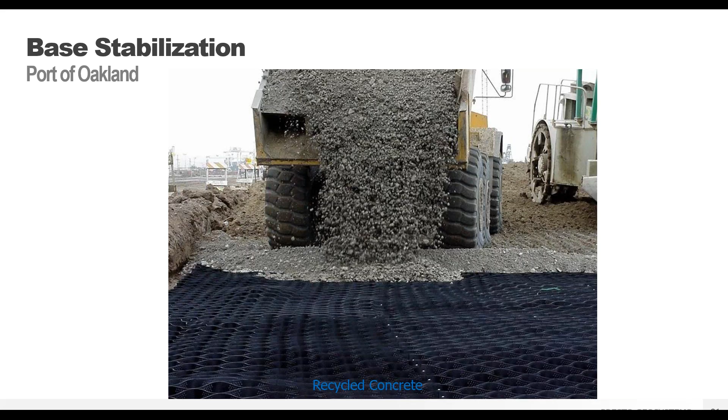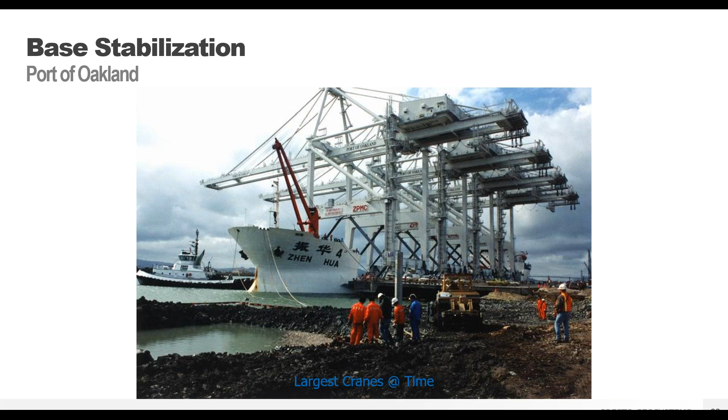The biggest need for this project at the time was the installation of the largest cranes at any port in the U.S. at that time. So the wharfs are still in operation today, with very limited maintenance, not even bi-yearly. So the system is still in place.

This is a project we did in Dakar during the pandemic for DP World. The port had a 250,000 square foot area that needed upgrades to enable operation of the rubber tired gantry cranes.

So the terminal needed base layer and surface stabilization. The biggest considerations from them were cost and timing of installation. This was a design build, and GeoWeb offered value engineering considerations and benefits such as fast installation time, reduced cross section, and no need to surcharge.

It also eliminated the cement bound layer. This project actually used pavers, which typically require a cement bound layer underneath, and we completely eliminated that. You can see the recommended cross section from the engineer.

We do a lot of work with DP World, and they look at GeoWeb for soft areas where differential settlement is a concern.

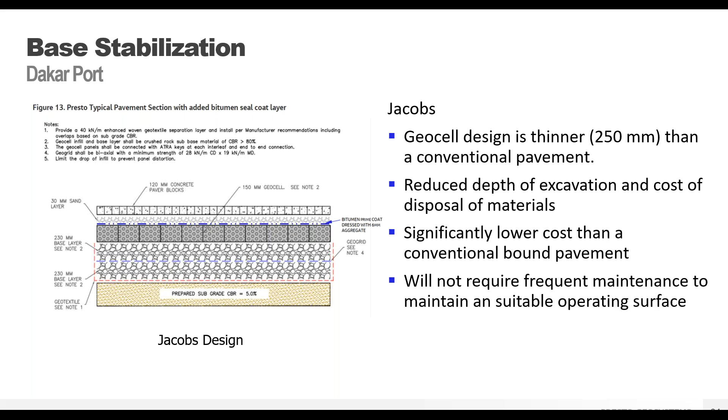Typically they're using 100, 120 millimeter pavers on top of the GeoWeb. This was design build. Once again, it was during COVID, so with the COVID travel restrictions, on-site support was limited to Teams calls. Not even our distributors could access this site, but the contractor was able.

We worked with him using our online webcasts, videos, and installation guides. We connected with them along with our local distributor via Teams. We went through our detailed website, provided all the necessary information so they had a successful project. Our website has a link to our YouTube channel with hundreds of videos showing proper installation techniques. So typically we will have an on-site person to help the contractor get started, and also a pre-construction meeting beforehand.

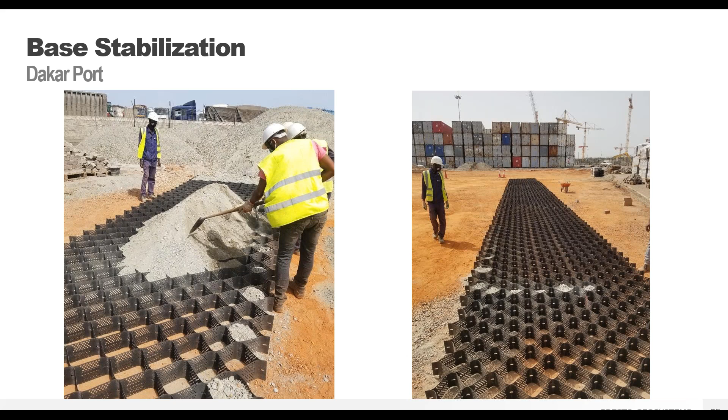Once again, interlocking concrete pavement blocks were used. The first 100,000 square feet area of the container yard was successfully installed just before the rainy season. It has been in regular use with no settlement or maintenance needed over the last 3 years. Even with exceptionally heavy rain and flooding events, to date, no settlement has been experienced.

This is a project that we are actually working on right now with DP World in Manila. This is a 3-acre site with a CBR of about 5, so it wasn't really that bad. But when they looked at doing the design for the cross section using the heavy duty ports method, the cross section was pretty significant due to the heavy loads. So we worked with them to reduce the cross section using GeoWeb.

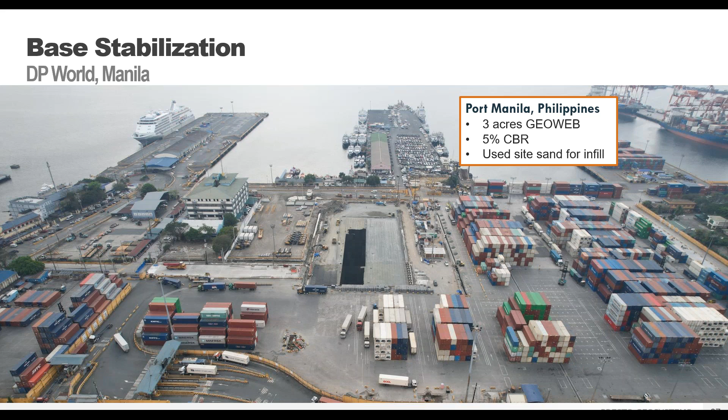Here you can see an overview of the site. You can see that they already installed 1.5 acres of GeoWeb here, and they're filling it, and excavating here for the next phase.

We did include a geotextile separation layer on the GeoWeb. This one actually had a 30-inch base, a 6-inch GeoWeb, a 1-inch sand leveling layer, and then the paving blocks.

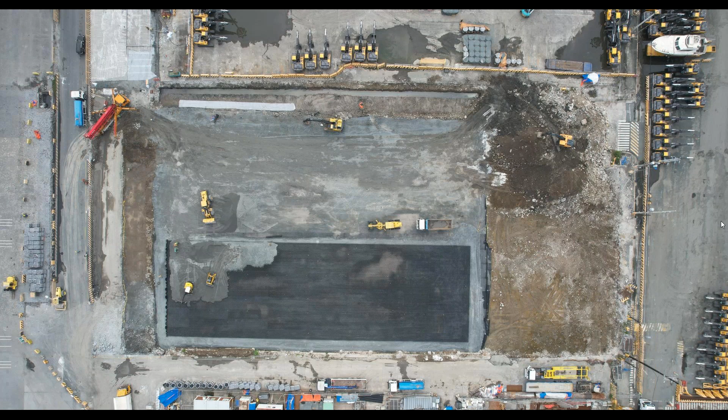We reduced the cross section by about 25%. The GeoWeb was selected for base layer load since it reduced, like I said, basically the over excavation and the backfill that was required. So we limited the requirement for using the high quality aggregate and also the cement bound pavement, which led to a significant cost savings. The locally sourced crushed rock was used for the base and GeoWeb infill.

Here you can see just a close up. This contractor once again wanted to have a very precise installation, so they used number 5 rebars in every cell or every other cell to make sure the installation was perfect. And you can see how nice that installation looks.

You can see once again the panels being filled with that less costly, sandy crushed aggregate material. They start out with a little bobcat, and then they come by with a dozer or bulldozer with the GPS system.

As I mentioned earlier, for any type of hard surface pavement, we're going to have a full design, including cross section, calculations, and we can provide specifications for concrete, roller compacted concrete, or pavers. What method we use will depend on what type of pavement.

Like I said, we can use the AASHTO method, the guide for roller compacted concrete if that's what you're going with, or the British ports method if it's for pavers, and the structural design guide for ports. So there's a lot of different methods that we use, and we'll work with you on that method.

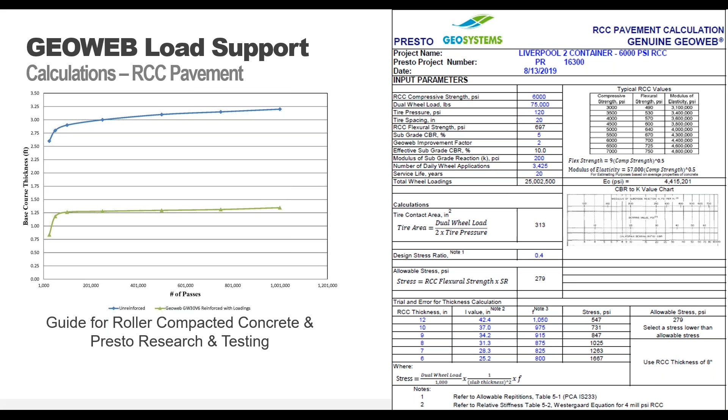So in summary, the GeoWeb system can be added to your project to provide a more stable and longer lasting surface course for unpaved surfaces, which will reduce maintenance repairs. For paved surfaces, including asphalt, RCC, and reinforced concrete, GeoWeb decreases pressure on the subgrade to reduce differential settlement and long-term settlement, extending pavement life and reducing maintenance.

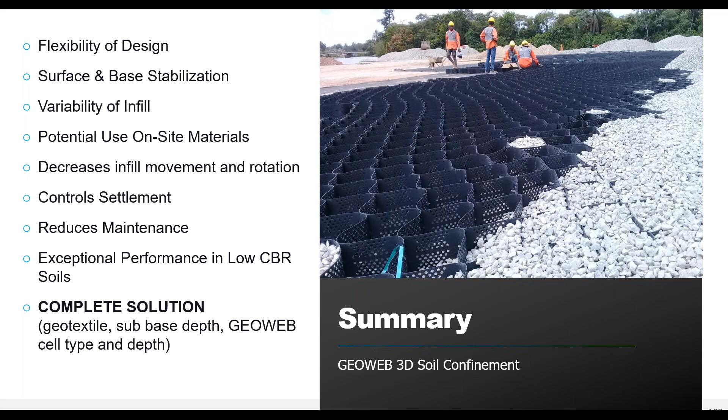The ability to use low-quality aggregates, coarse sand, and recycled materials provides significant savings to your project, not only in the cost of materials, but also in transport costs. The ability to reduce stress on the subgrade can potentially reduce the final pavement thickness. And we offer that free, complete solution in our design package.

I'll just take a quick moment on concrete filled GeoWeb. We did concrete filled GeoWeb. We see a lot of concrete filled channels along ports in the mill yard to control drainage.

We've done a lot of study at the hydraulics lab at Colorado State, out in Fort Collins, under the direction of Dr. Chris Thornton, who is probably one of the most renowned experts worldwide in hydraulic modeling. This is at the Horsetooth Reservoir. It has 250 feet of static head, so they get a lot of water through their indoor and outdoor flumes.

We did the channel study on aggregate, topsoil, and concrete filled geocell. So we have tools and methods to provide aggregate solutions for riprap to significantly reduce the size of riprap, topsoil channels that are not routine flows, and also hard armor concrete. That's what the majority of the ones we've constructed along with ports are, just because of how much water is on a site.

For concrete, we ran 3 different tests. Concrete was 3-inch geocell, 2-to-1 sides or slope. Velocities were 36, shears up over 21 pounds per square foot. We're the only geosynthetic, including ACBs, turf reinforced mats, erosion control blankets, or any other kind of solution to ever max out the flume at Colorado State.

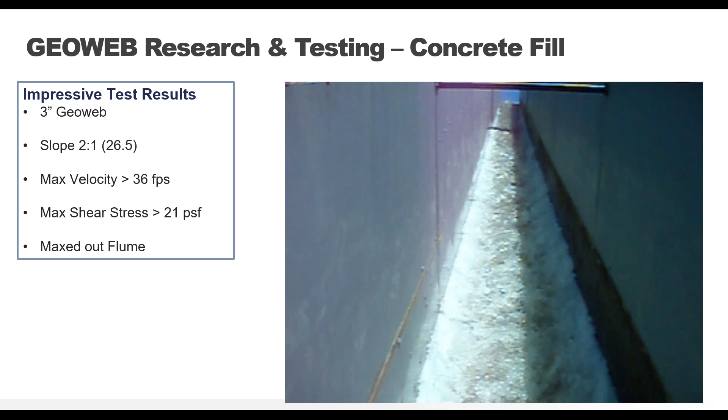So we're pretty confident that we can provide a concrete channel that's going to save you money in construction costs, but also give you a very durable surface. This is the kind of flow rates, 3 tests of 1 hour. So a significant amount of water.

There are many benefits to using concrete filled channels. It's a total integrated system for all applications - the geocell panels act as the formwork, so you don't have to have any formwork or provide internal reinforcement separately. There's no rebar needed. The geocell cells and the connection between the perforated sections provide the reinforcement.

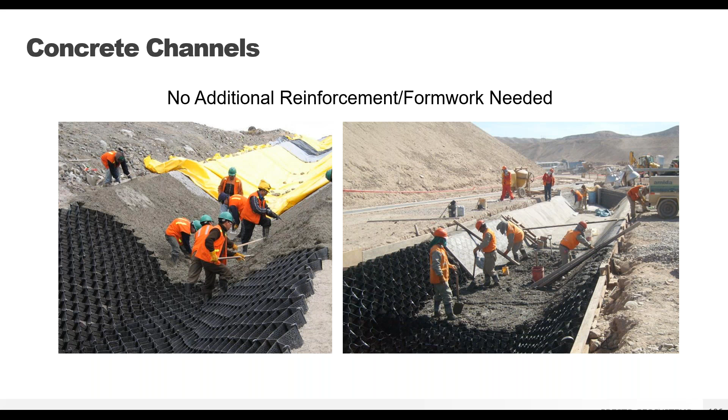Think about the material and labor cost savings, since there's no rebar required. The speed of installation is increased significantly due to elimination of rebar. You just fill the geocell panels with concrete and screed it to the top, and that's your channel.

The panels are very flexible, so we can install on curves, dips, different slopes. All you do is adjust the slope in the field to handle the different slope angles, even verticals. You can see at this culvert what they did - they just formed it up, and here they're screeding it and pouring it. When they get up to here, they almost had to hand place that. It's almost at a 75-degree angle.

Just a slide showing a typical panel going in. This one used tendons, polyester tendons, and a pipe rebar or a pipe dead man at top. You just run these polyester tendons through, tie it off to the pipe dead man, and bury that. It's just like hanging a set of drapes, where you secure it from the top and they hang down.

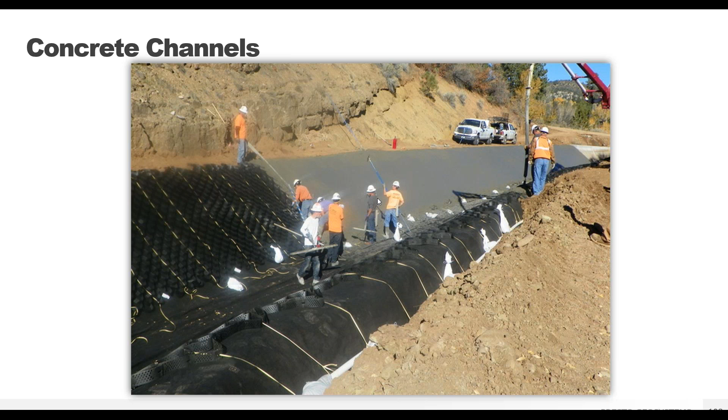Here you can see they're just pumping the concrete into the geocell, adjusting the slope in the field, screeding it off to the top of the cells, and there's your channel. And just a finished installation.

Here's the project - this was a big project we did for Union Pacific down in Laredo, Texas. The original design used reinforced concrete on the side slopes, 2-to-1 side slopes, 6-inch depth here in the channel, and then they used 2.5-inch grout bags on these side slopes. So when it went to bid, it was significantly over budget, and they came to us for a VE opportunity.

We came up with the geocell system where we used 3-inch geocell concrete filled on slopes and 4-inch geocell in the channels here - this is over 750,000 square feet of geocell. We used a little thicker concrete in here because they're going to use trucks on a routine basis to go and clean out the material in there for sediment removal.

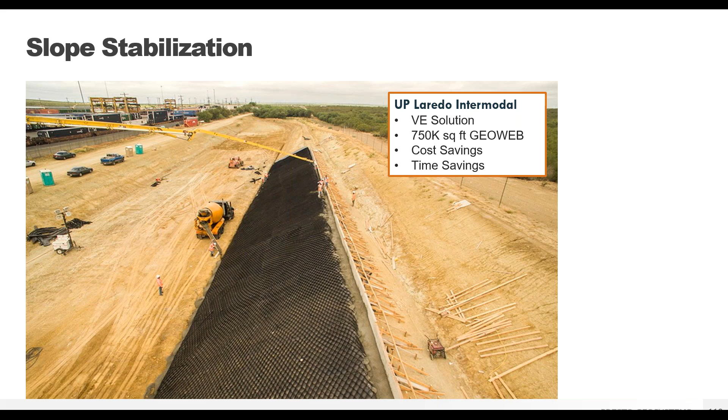Here you can see the concrete once again just being placed, being placed into the panels. A couple guys taking a break. And here you can see the extent of it going all around this intermodal yard.

750,000 square feet - they saved a significant amount of money. Here's the 4-inch depth in the channels. They saved a significant amount of money in cost.

You can imagine eliminating all the time of forming for reinforced concrete, 6 inches of reinforced concrete, placement of the rebar. They replaced it with 4 inches of geocell, which significantly reduced the depth, but the labor savings and time was the biggest thing for the port. They got into service months earlier because it sped up the timeline so much.

A question we get all the time is costs. We have a base comparison, low CBR, 0.5%. That's where geocell really shines - at 3% and less, those are low subgrade strengths. All geosynthetics have their place, but we really shine in the low subgrade CBRs because we have such a significant amount of stress reduction, and we can cut down that cross section.

We can also use salvaged on-site materials typically, so you're going to save not only in material costs but also in aggregate savings. When looking at a geocell solution, you've got to look at more than just the cost of the material - you look at the overall cost of installation, the aggregate savings from maybe using on-site materials or less costly aggregate.

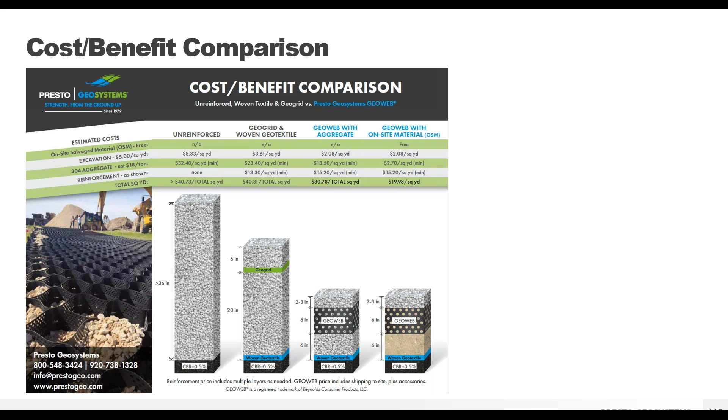And we can help you provide those opportunities. And if we know we're not the perfect solution for all applications, we'll work with you and our local distributors all around the world to provide the best, most cost-effective solution to fix your problems.

We have a very detailed website, prestogeo.com. Many tools for you. We have quick links for everything from products through applications, design, installation. Here's learning, where all of our online webcasts are stored. Here's our YouTube channel, with hundreds and hundreds of videos.

If you are interested in doing a project evaluation, you just click on get a free project evaluation. That opens up this tab. Fill it out, send any information, and if you have any geotech report or cross sections or proposed designs, we'll take it in, usually 1 to 2 days. We'll get back to you with a full evaluation for your review, and we'll hook you up with our local distributors so they can provide costs also.

If you want to discuss a project, just reach out. We're readily available for any kind of discussions, and if we're not a good solution, we'll point you down the right path. To make it faster and easier for you to obtain your PDH certs, we have a webinar dashboard.

With our webinar dashboard, you can easily view our library of webinars and download PDH certs. For on-demand webinars you complete, we'll keep a record of all the webinars completed along with the PDH credits earned. Please note that certificates for live webinars are managed separately from the on-demand webinars. You won't find your certificate from today in there, but you will receive an email from GoToWebinar in the next day or so containing a download link for your certificate.